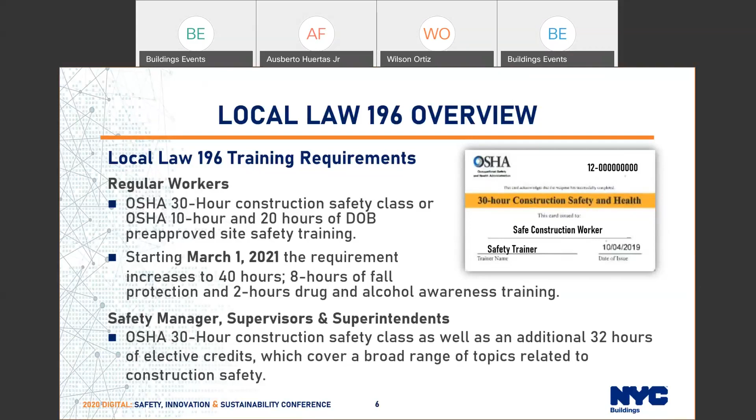Local Law 196 also requires the issuance of site safety training cards. These cards are needed for all active sites requiring a site safety professional. A construction superintendent is required to oversee construction sites up to 9 stories. A site safety coordinator is required to oversee safety on construction sites 10 to 14 stories. A site safety manager is required to oversee safety on construction sites of buildings 15 stories and higher.

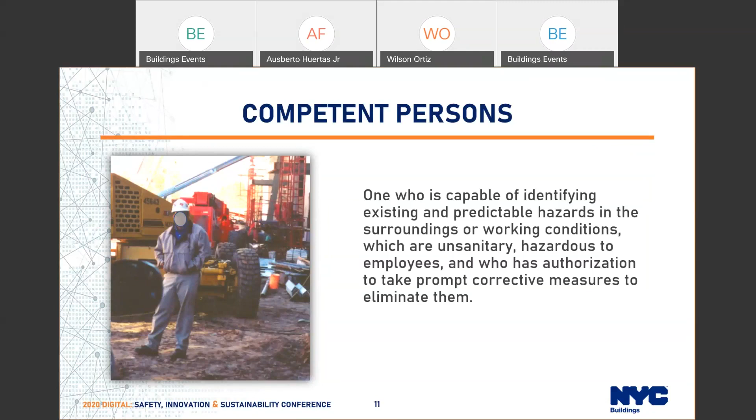Some do's to be aware of if you're selected as the competent person: maintain a site safety presence at all times, stay on site during active construction or until you are relieved from duty, be knowledgeable on the construction activities being performed, keep up to date on training, and keep up to date on new means and methods.

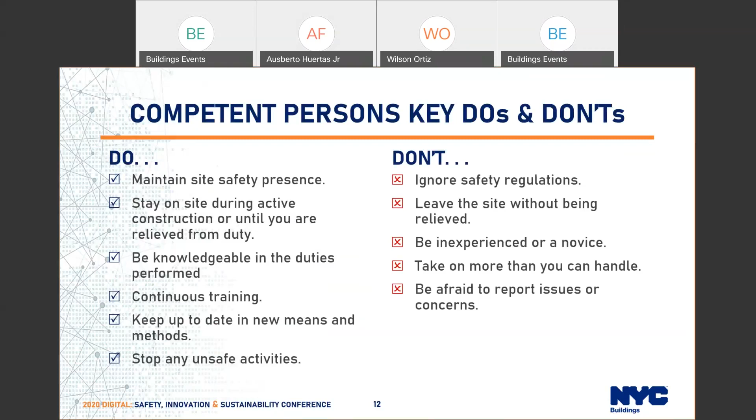Stop any unsafe activities. Some don'ts for being the competent person: don't ignore safety regulations, don't leave the site without being relieved, don't be inexperienced or a novice, don't take on more than you can actually handle, and don't be afraid to report issues or concerns. Remember, safety is everyone's priority.

The next topic we will be discussing is cold-formed steel construction, including incidents and their hazards. We will review case studies which resulted in injury or a fatality, what caused them, and how they could have been prevented. Please keep in mind, every site is different, and prevention measures shown in this presentation may differ from site to site. Not all solutions are suitable for every site.

C-joists are engineered products that perform differently than wood joists. C-joist components provide an economical, lightweight alternative to open web steel joists, cast-in-place or hollow core floor assembly systems, and engineered wood joists. C-joists come in a variety of depths, flange sizes, and steel thicknesses.

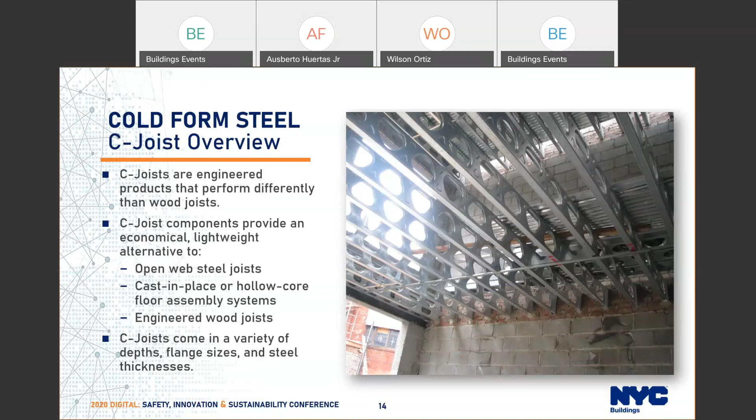Cold-formed steel is commonly used in 1 to 4 story new building construction. It allows for quicker installation of multiple stories due to its light weight. A special inspector must verify the construction of cold-formed steel during its installation. The professional engineer must inspect and approve prior to placing any loads.

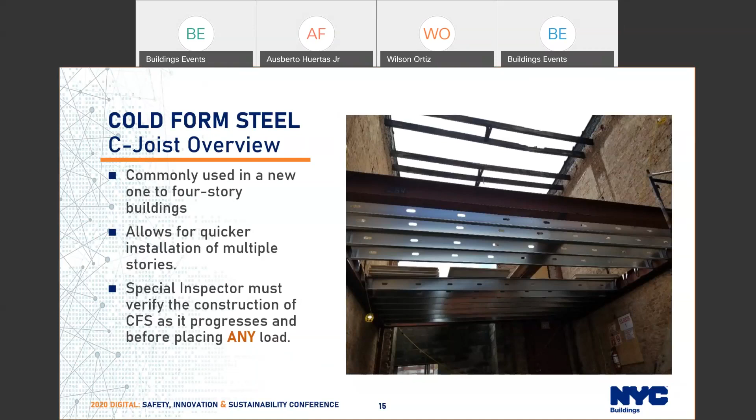In this slide, we have a comparison of wood joists versus C-joists. Here you can see the major differences between the two materials. Some highlights are: timber joists weigh around 7 pounds per linear foot versus C-joists, which weigh around 3 pounds per linear foot. These measurements are based on a 10-inch joist.

Timber joists are not easily accommodating for pipes and ducts, whereas C-joists are manufactured with mechanical pass-throughs. This chart also shows the factor of safety, which takes into account design errors, material defects, and connection errors. With that in mind, wood joists have a factor of safety of 8, compared to C-joists, which have a factor of safety of 0.5. When fully installed, the factor of safety is then increased to 2.5. This shows how important it is that C-joists are installed per the manufacturer's recommendations and the engineer's plans.

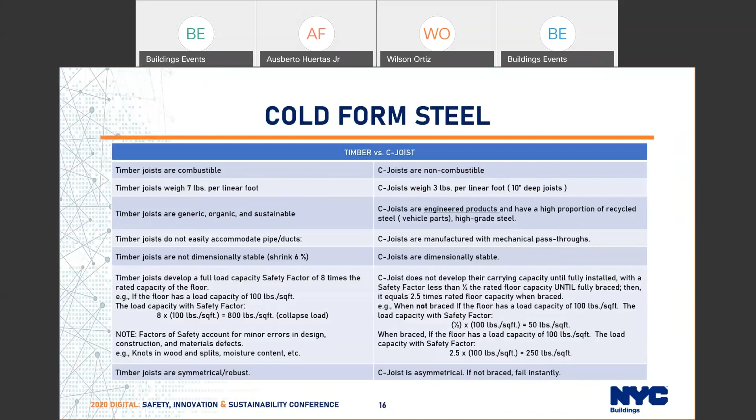Due to the number of incidents through the years, the Department of Buildings has published C-joist system awareness handouts to address bracing and overloading issues. The department has also embarked on an industry outreach campaign that includes C-joist manufacturers and providers.

The outreach notification informed the industry of the following: don't place any loads on decks before properly mounting, fastening, and connecting the C-joist system together. Decks must be completely fastened to the C-joist system before loading. Never overload a deck. Review and follow, without deviating from, the design drawings and the manufacturer's specifications. We will show you examples of these in the upcoming slides.

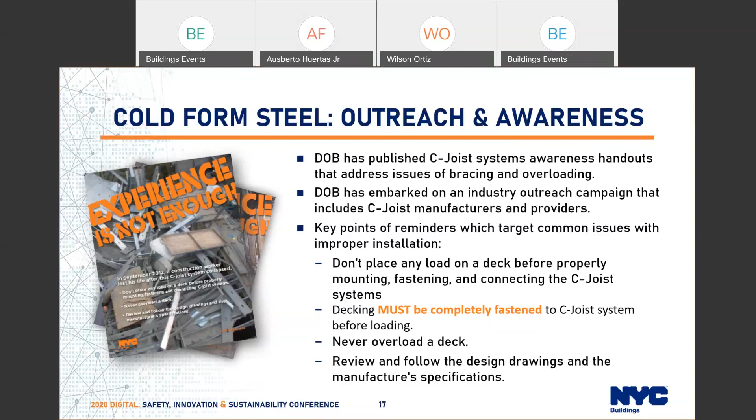Keep in mind that these photos do not take into consideration the overall stability of the structure. It is the responsibility of the licensed professional to design the floor diaphragm and all of its relevant connections, and to take into account wind and seismic loads in the layout. Precautions must be taken to avoid construction overloads and exceeding design live loads.

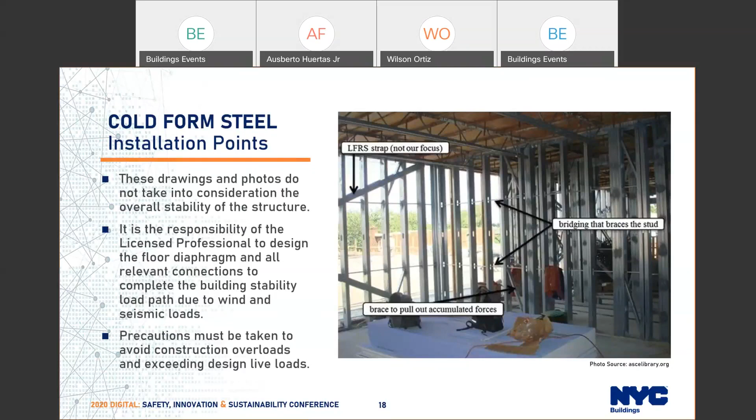Temporary bracing must be installed at the time of installation. It is not to be left out, as it is harder to install after the fact. The joist bridging must be installed when the floor is constructed. Failure to install the bracing at this time may compromise the structural integrity. This is for your safety as well as others.

Notice the number of required parts it takes to properly brace the cold form deck: the flat straps on the top and bottom, joist blocking, and screwing straps, making sure they are screwed into each brace and joist. The decking must be completely fastened to the C-joist before loading the system. All these listed parts are needed in order to secure the system.

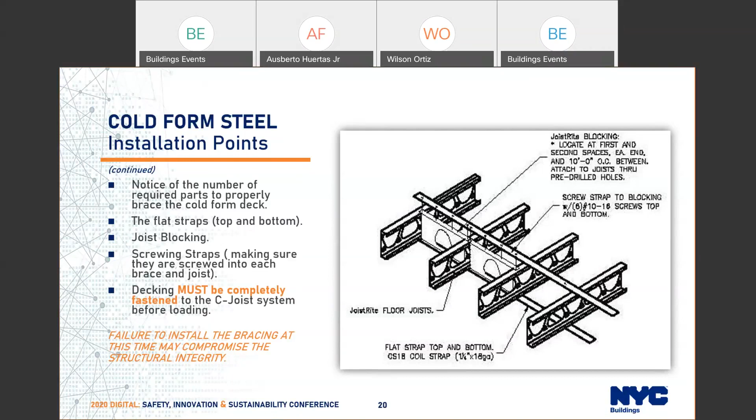Again, failure to install the bracing at this time may compromise the structural integrity. We cannot emphasize this enough.

Keep in mind, the manufacturer's specifications are part of the approved drawings. The system will fail if it's not followed. The system is not secure until all supports, web stiffeners, and connections, along with the bridging, are properly installed.

Pour the lower floor first, before installing the upper floors, to help carry the loads of the upper floor. The key is to tie all the walls together.

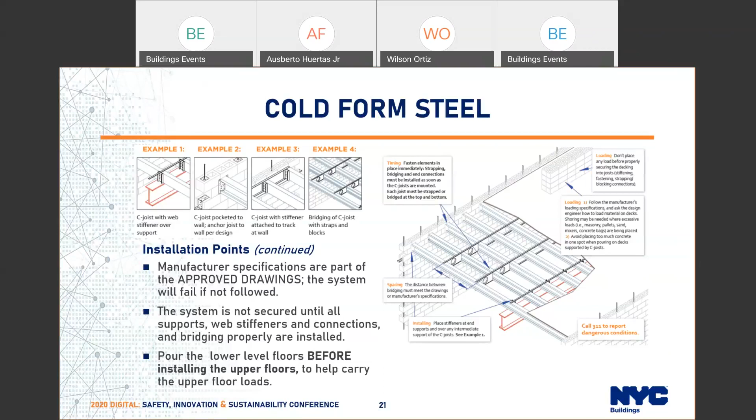During construction, placing even light materials on the unbraced top flange of the C-joist can cause instantaneous sideways buckling. It is an instant, progressive collapse of all the joists, resulting in a large opening.

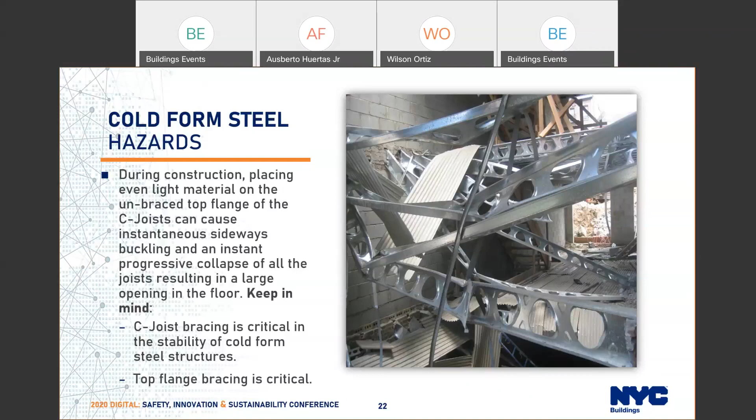Keep in mind, C-joist bracing is critical to the stability of cold form steel structure, and in the installation, the top flange bracing is very critical.

Even in different configurations, until fully installed and braced, C-joists can be structurally unstable and occasionally can collapse without warning. Remember the factor of safety for cold form steel? It's 0.5, and when it's fully installed, the safety factor is then increased to 2.5. It must be installed per the manufacturer's specification and the approved drawings, or it will fail.

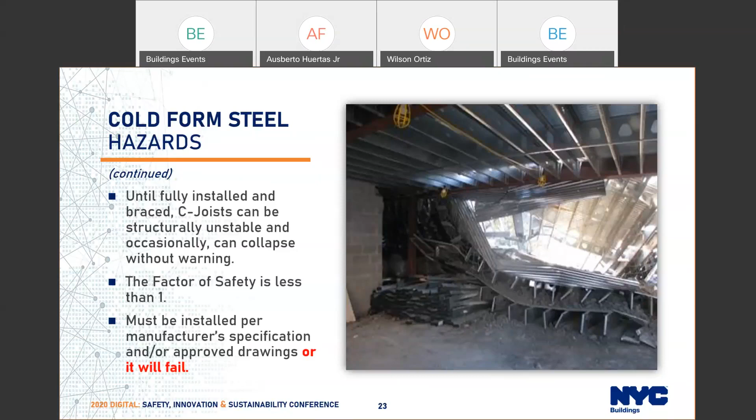As a reminder, cold form steel collapses are very rapid and progressive. It often comes without warning and does not leave enough time for the workers to evacuate. The incidents are usually associated with overloading a platform or not properly fastening and tying the system together.

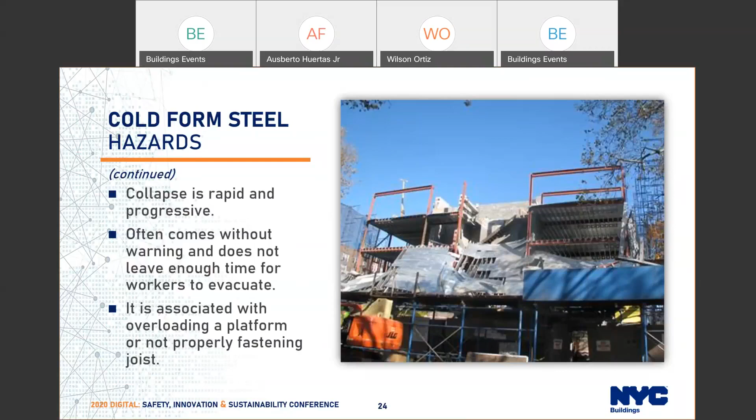I know some of these are repetitive, but it's only to emphasize its importance. The typical causes of collapse are usually due to overloading in areas that are not braced or ready for a load. Stiffeners, bracing, and bridging are usually missing in these incidences.

And failure to pour concrete floors below can cause the exterior walls to buckle, as you can see from this picture.

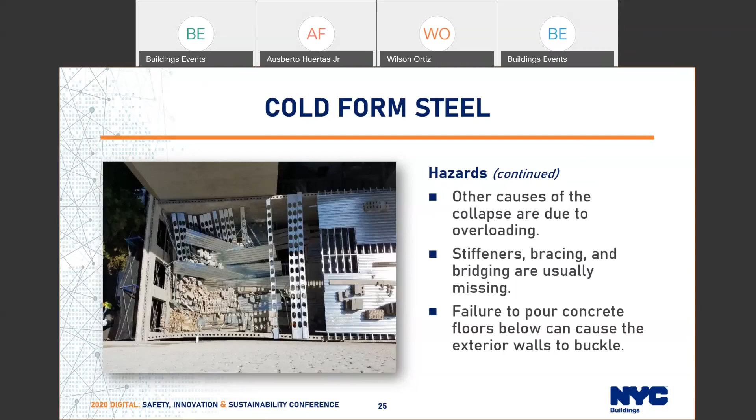This incident occurred in the Bronx in August of 2019. A new 4-story cold form steel construction with CMU blocks: an overloaded elevated deck collapsed. When the load was placed on it, the front half of the 3rd floor deck fell onto the 2nd floor.

With workers underneath it, as a recap, this building received a delivery of CMU blocks which were delivered onto the 3rd floor deck. The deck was not fully installed nor braced. The 3rd floor deck was still in the framing stage and was not shored and braced against rotation or lateral movements. Other workers were staged and working on the floor below. When the CMU was placed on the deck, it triggered the collapse and caused death to 1 worker and injured 5 others. Some of those injured were buried in the collapse and had to be rescued.

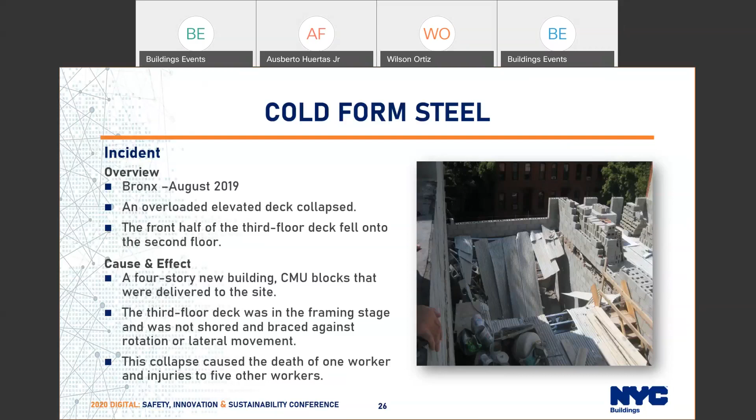Key prevention takeaways for this incident are: prior to loading the deck, ensure it is properly installed per the manufacturer's and the PE's instructions, which we can't stress enough, as this is one of the leading major issues for cold form steel. Never store materials or equipment on floors that are not fully constructed or braced. And prior to placing a load on a deck, verify with a PE that it is safe to load.

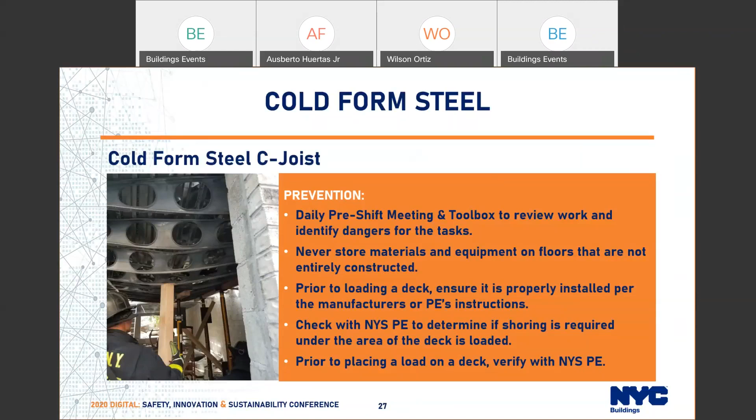This incident involved an 8-story building where, again, CMU blocks were being delivered to an unsecured deck on the 7th floor. The C-joists were not braced and tied, and the floor decking was missing when it took the load. This collapse caused 2 workers to be injured.

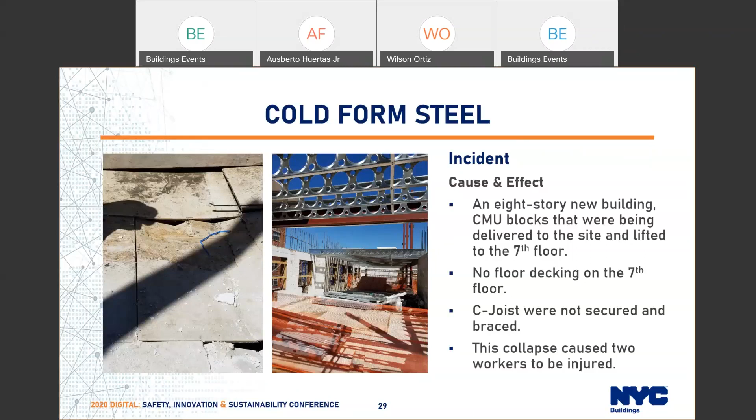Key prevention takeaways for this incident are: a daily pre-shift meeting and toolbox talk to review the work and identify dangers. Workers should have 30-hour OSHA training, fall protection training, and site safety training. Fastening and securing with a pre-inspection should have occurred prior to loading.

Complacency can cause workers to think that they will never be injured. Even if it's done multiple times, it only takes 1 time for something to happen.

Patricia will now present trenches and excavations.

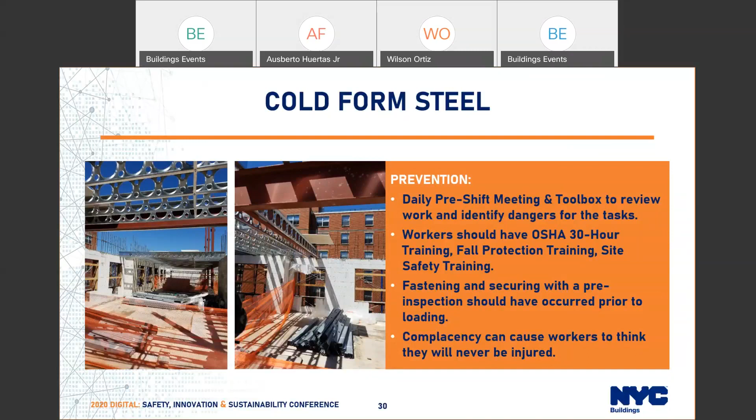Now that we've learned about cold form steel, let's move on to trenches and excavations. In this segment, we will discuss hazards, requirements, incidents and preventions, and we will wrap it up with some safety tips.

After all plans and drawings have been approved and permits are issued, the first thing to do before the start of chipping, digging, or blasting is to notify DOB. Let DOB know 1 to 2 days before any excavation work starts. Call 811 before digging. A ticket number will be issued.

Then call 212-393-2550 with the ticket number.

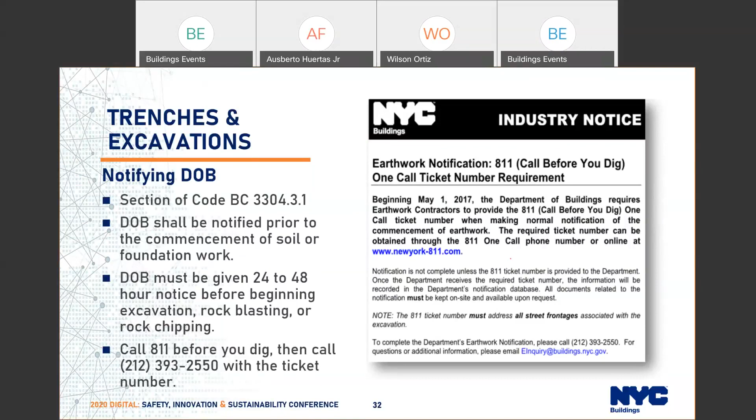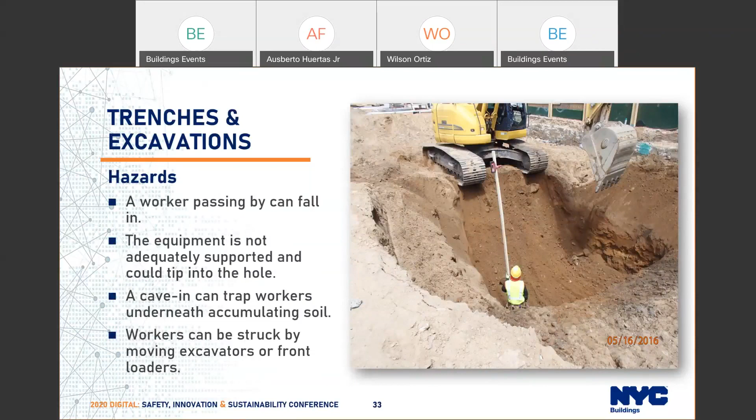Without the proper safety precautions in place, excavation and trenching are among the most hazardous construction operations. Without guardrails, a worker passing by can fall in. If equipment is not properly supported, it can tip in. Cave-ins can trap workers, which almost always cause a fatality. Workers can be struck by moving heavy equipment.

Excavation or trenches 5 feet or deeper require shoring and bracing, or a 45-degree angle of repose, with each step not being higher than 5 feet. When the depth of a trench or excavation is greater than 4 feet, it is required to perform air monitoring as oxygen becomes deficient.

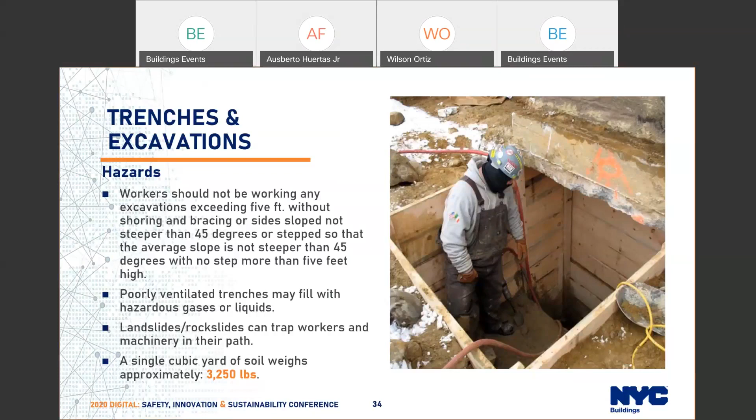Poorly ventilated trenches may fill with hazardous gases or liquids. Other hazards include landslides and rock slides, which can trap workers and machinery in their path. To put this into perspective, a single cubic yard of soil weighs about 3,250 pounds, which is the weight of a small car.

Building codes are in place to help mitigate hazards. The first step in preventing incidents from taking place is to build a construction fence prior to excavating. The construction fence is required to be 8 feet high and built solid for their entire length. A construction fence should be installed in order to protect the workers and the public from any hazards related to the excavation.

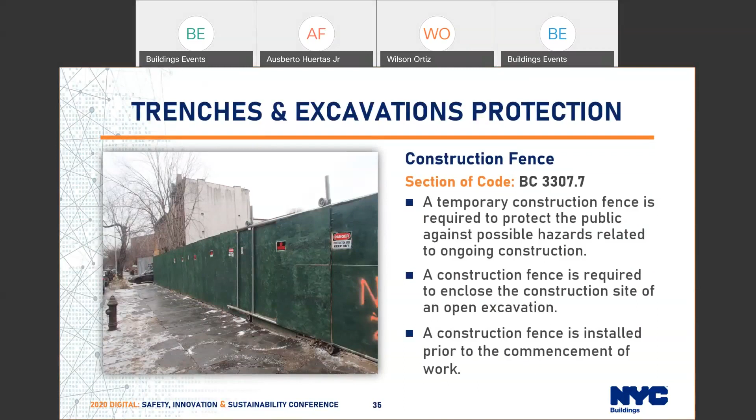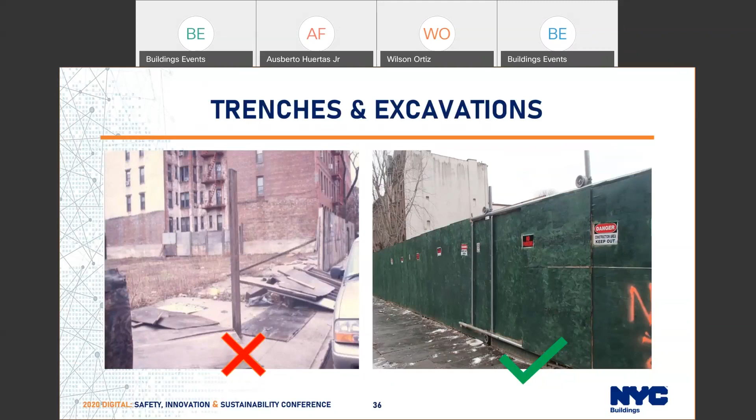The first line of defense a worker has when working by an excavation are guardrails. Guardrails are a key visible reminder that there is an excavation and that workers need to be mindful of what is going on around them. Guardrails protect workers from accidentally falling into the excavation.

The guardrails shall be made up of a top rail, which should be between 39 to 45 inches above the floor, a toe board, which should be 3.5 inches high with no more than a 1/4 inch gap between the floor and the bottom of the toe board, and the mid rail, which should be halfway between the top rail and the toe board. The other option for a guardrail is a solid enclosure of 3.5 feet.

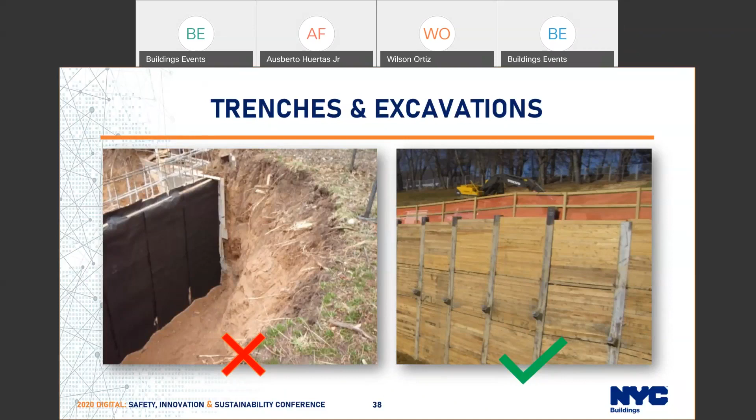This is the first incident that we will be reviewing. It took place in Queens in January of 2019. The support of excavation collapsed into the construction site along with 40 feet of the boulevard. Workers informed our inspectors that they were concerned for their lives while they were working in the excavation. If you see something that does not seem right, please bring it up to the site safety professional.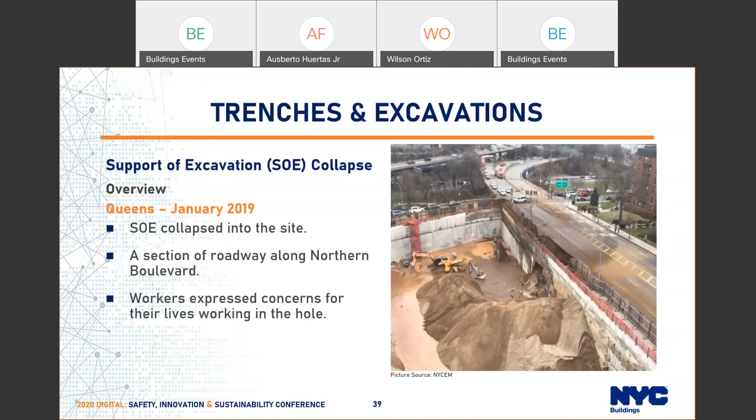Here, support of excavation was not maintained, nor was it built according to the approved plans. On the right side of the photo, there are soil nails, which was supposed to be placed every 5 feet in both directions. If you look closely, you can see they stopped placing the soil nails towards the bottom, as the workers were told it did not need to be done. What you can't see was the soil nails were supposed to be grouted as well, which was also not done.

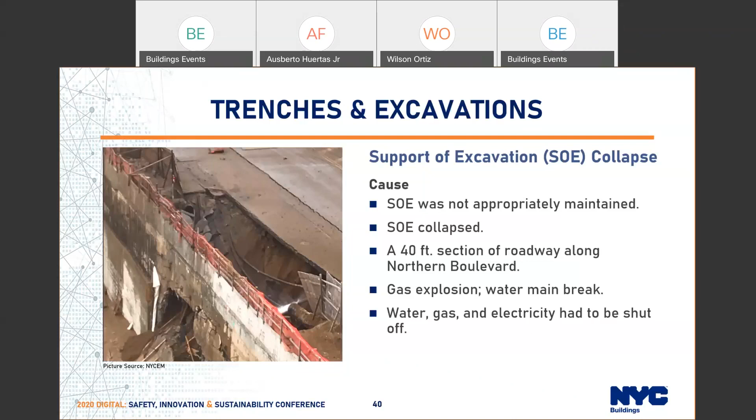As they were working, the workers noticed the walls were bulging at the bottom. If you look to the left by the waterproofing membrane, the top of the wall was 24 inches thick and the bottom was 8 inches thick. Because the wall behind it was pulling out as they were pouring the foundation, eventually the pressure caused the wall to blow out. This collapse caused a gas explosion and a water main break, which had to be shut down. The boulevard was also shut down to traffic.

An important element to preventing incidents on construction sites are the daily pre-shift meeting and toolbox talk. These meetings should identify the tasks of the day and identify any hazards associated with those tasks. One cannot protect themselves if they are not made aware of the risks and hazards of each operation.

All drawings have the factor of safety associated with the design. However, the factor of safety only takes into account minor material defects or installation errors. Factor of safety will not compensate for missing all of the lower soil nails from not being installed and properly set.

The weight of the adjacent road collapsed into the excavation due to not installing the support of excavation according to the approved plans. When performing these operations, it is standard to monitor the movement of the walls. Had monitoring devices been installed and utilized, there is a strong possibility that the collapse would not have occurred. The monitoring device would have raised a red flag to the PE or the super, who would have stopped and analyzed the situation and determined the issue and how to remediate it.

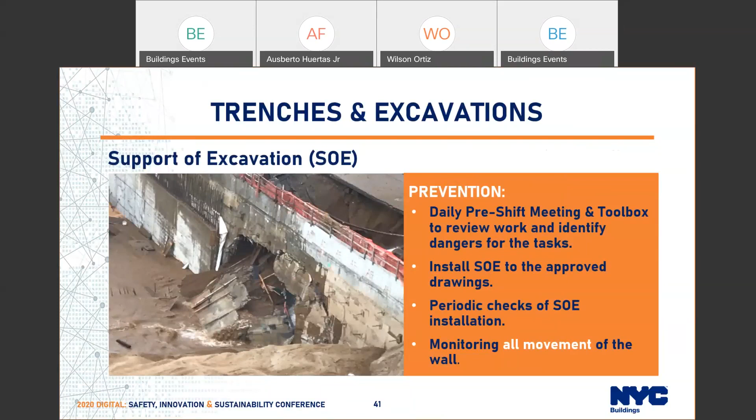Moving on to how to protect an excavation. Per the DOB building code, all sides of an excavation with a depth of 5 feet or more shall be supported by either installing sheeting, shoring, or bracing, or the side slope are not to be steeper than 45 degrees, or stepped so that the average slope is not steeper than 45 degrees. There should be no step more than 5 feet high.

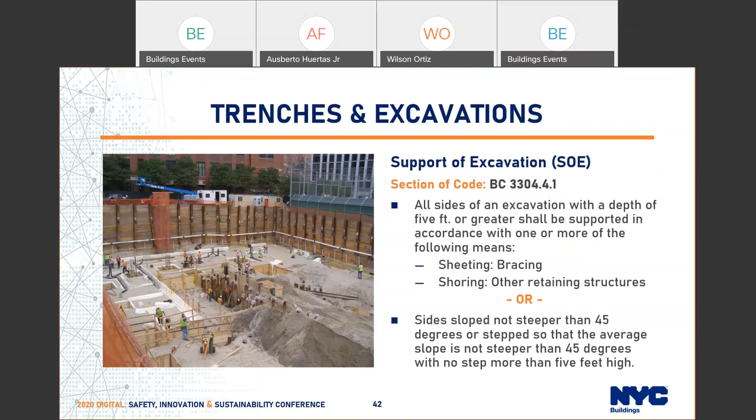To the left, we have a picture of an excavation with the support of excavation missing. The picture on the right shows the proper support of excavation in place. Here we see the soldier piles and lagging providing the needed support to hold back the soil from collapsing into the wall.

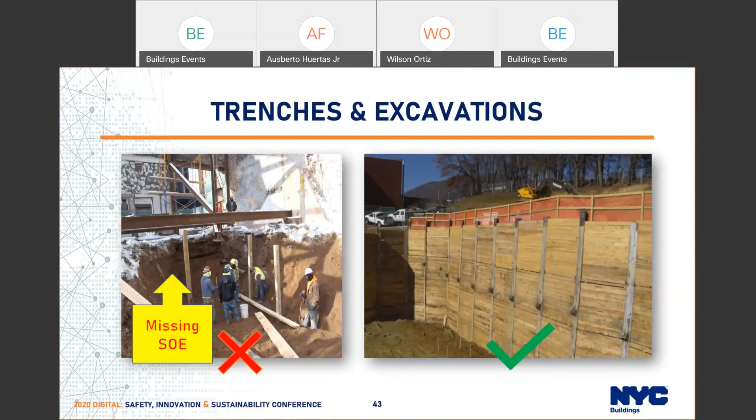In this next comparison, on the left, we have a picture of another excavation. The trench box is missing in this case. A trench box is typically used when performing utility work or working in small spaces. The picture on the right shows a worker in a trench box, which are usually 8 to 12 inches thick.

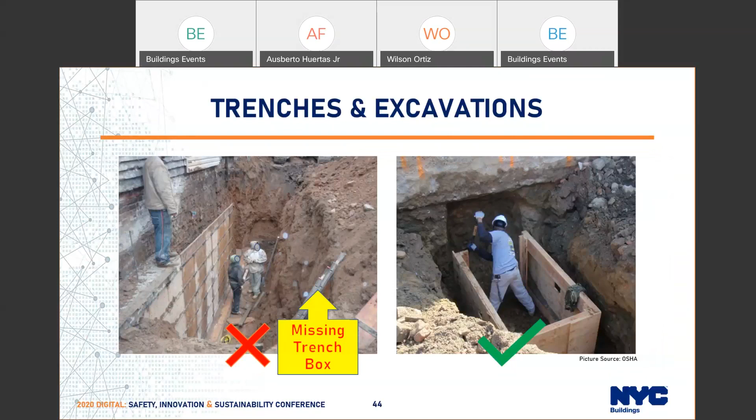Again, on the left, we see a picture of an excavation, and there is no support of excavation, no trench box, and no angle of repose. On the right is a diagram showing an angle of repose. As a reminder, the side slope are not to be steeper than 45 degrees, or stepped so that the average slope is not steeper than 45 degrees. There should be no step more than 5 feet high.

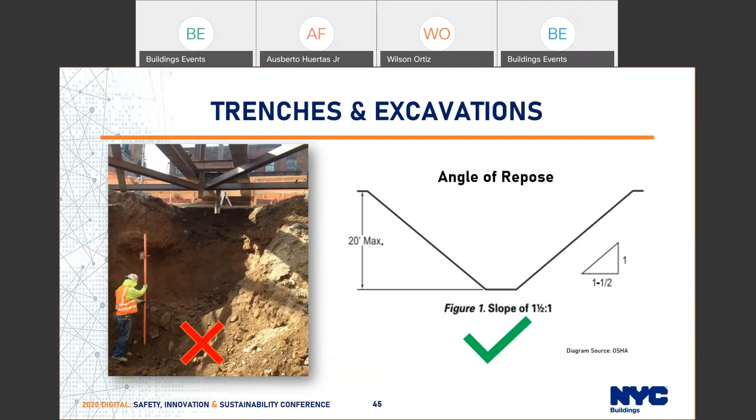Another potential hazard that workers are at risk for is caught in between. A worker can be caught in between heavy equipment or objects and sides of the excavation. The work going on in a trench may also create a hazard. For instance, when laying pipe in a trench, a caught in between hazard exists because workers can get caught in between the pipe and the trench walls.

Anything being placed into the trench or excavation may be a hazard, including the protection system. Workers must be careful while installing the protection system so they are not caught in between the trench walls and the protection system. Keep heavy equipment away from edges of trenches and excavations, as it should be 1.5 times the depth of excavation until shored and braced.

Trenches or excavations can be very dangerous when they have water inside. The water can soften the soil and cause it to collapse. Workers should not work inside an excavation where water has accumulated or is accumulating unless it is controlled by using pumps or other equipment. Water in an excavation can undermine the sides of the excavation and make it difficult for workers to get out.

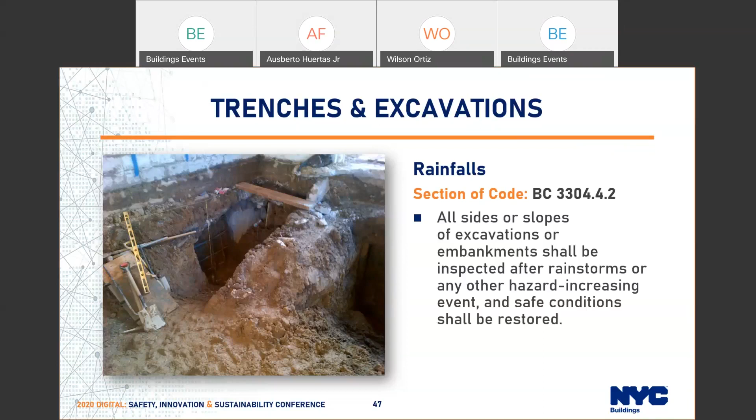Workers should not enter an excavation where water has accumulated or is accumulating unless adequate precautions are taken to protect workers. Such precautions can include special trenching and excavation support or shield systems to prevent cave-ins, water removal to control the water level, or the use of a safety harness and lifeline.

Here are some safety tips to keep in mind for when you are around trenches and excavations. Before getting inside a trench, the trench should be inspected. Keep loads and spoils at least 2 feet from the edges of trenches and excavations. Do not work under a raised load. Know where underground utilities are located. Test for low oxygen, hazardous fumes, and toxic gases.

Ozzy will now continue with controlled access zones.

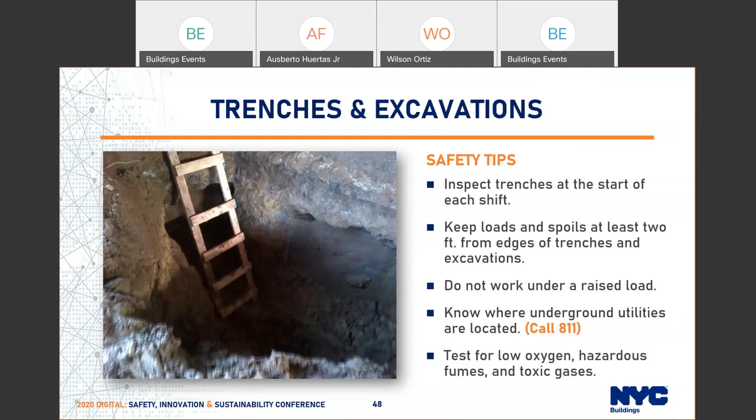Thanks, Patricia. In this topic, we will discuss control access zones. We will review case studies which resulted in injury or a fatality, what caused them, and how they could have been prevented.

Areas designated as controlled access zones must be visibly and clearly marked to alert the workers of the presence of a risk in that area. Wires, tapes, or rope control lines may be used to identify the hazardous areas. The control lines must be flagged at intervals of not more than 6 feet with high visibility material.

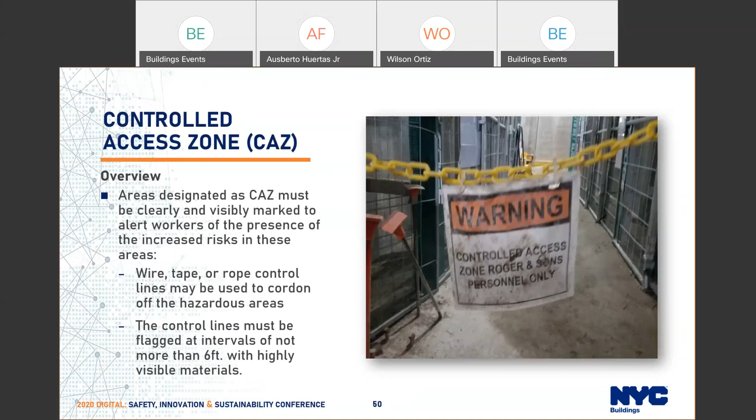Control lines must be connected to both sides of the wall or a secure guardrail system and must run parallel along the entire length of the leading edge. They must be strong enough to withstand the force of an impact of at least 200 pounds.

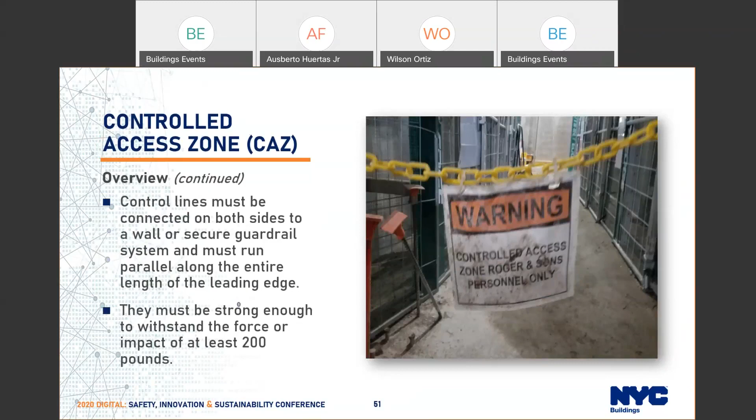Risk is higher in all directions of an established control access zone. Avoid the control access zone area if you are not working in that area. Workers should be trained in the proper use of fall protection equipment, the procedures of working in a control access zone, and know the hazards. Incorporating fall protection requirements into everyday activities will ensure worker safety in areas deemed hazardous due to high elevation or the potential of serious falls.

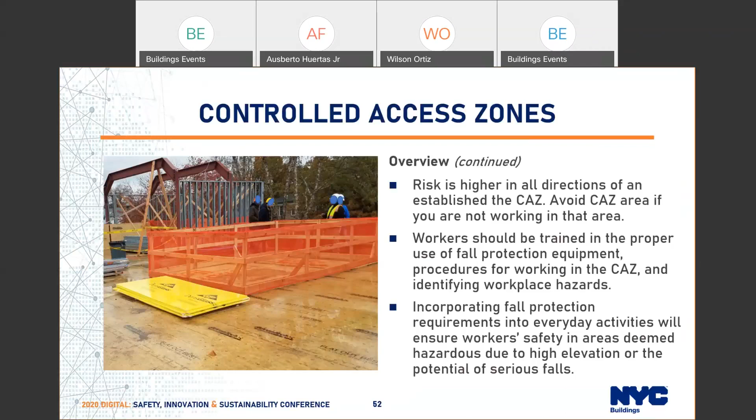When in a control access zone, workers must be tied off, as they may not have access to guardrails, safety nets, and a personal fall arrest system to rely on. When in a control access zone, ensure you are aware of the boundaries. Establish the restricted area and the limitations. In general, do not engage in unsafe activities, especially when in these areas.

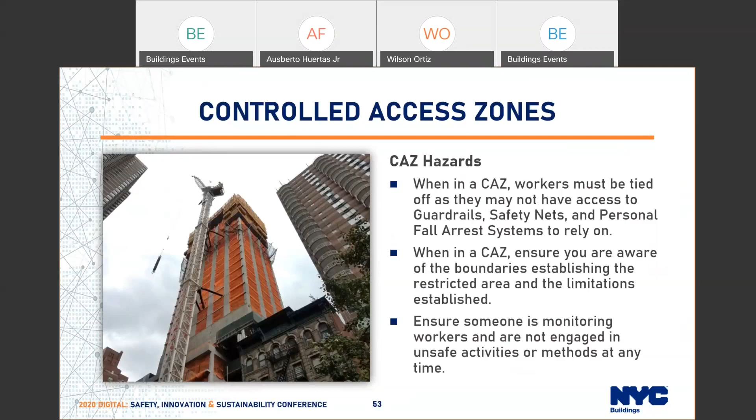This incident occurred in Manhattan on January of 2019. The worker fell from a 6th floor to the 5th floor. The opening was covered with an unsecured plywood, which was not properly marked, causing the worker to slip and fall. The plywood lacked any markings or warnings that a hole was present. No signs were posted in the area with an indication of the opening. No control access zone was placed in this area either.

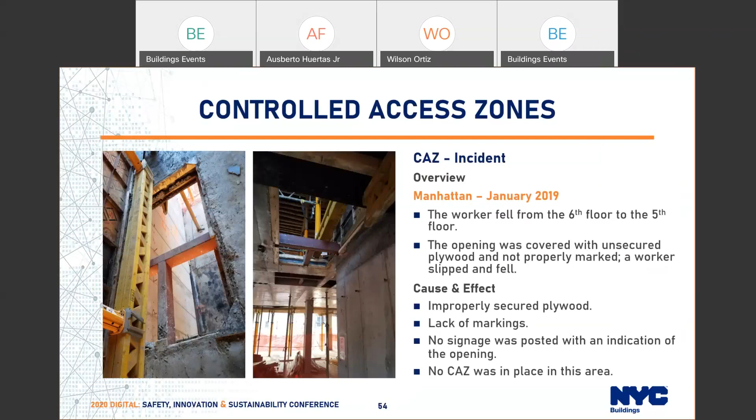Prevention measures should have included having a daily pre-shift meeting and toolbox talk to review the work and identify the dangers. Workers should have 30-hour OSHA training, fall protection training, and site safety training. The opening should have been covered with plywood, screwed down, and clearly marked.

Workers need to be aware of their surroundings when walking on a construction site. If you see a hazard, report it. Complacency can cause the worker to think they will never be injured.

This incident occurred in Manhattan on September of 2019. A panel fell during stripping operations on the 26th floor. A worker was walking underneath the work area when the panel fell. When DOB arrived, it became apparent that stripping operations were not clear to the workers. The removal sequence was not being followed at the time of the operations. A control access zone was not established around the fall zone area during these operations.

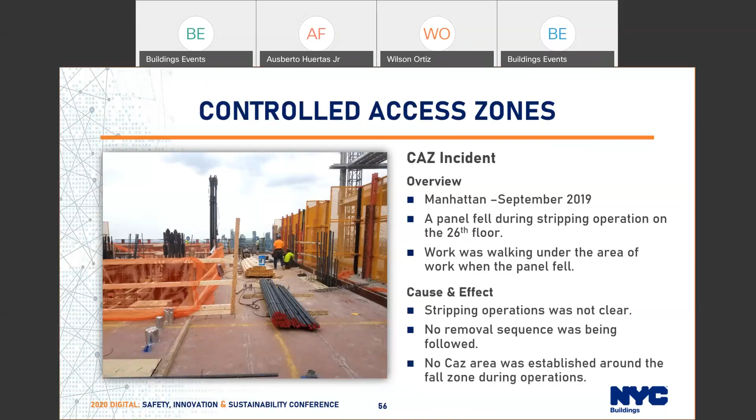Preventative measures should have included having a daily pre-shift meeting and toolbox talk to review work and identify the dangers. Workers should have had 30-hour OSHA training, fall protection training, and site safety training. Establish a control access zone with the proper means and method to perform the operation safely. Provide signage and set up monitoring during operations. And be mindful of the potential areas where debris can fall.

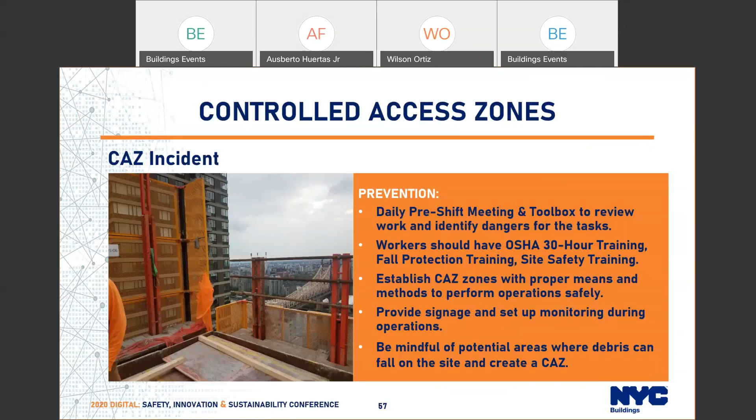Patricia will now discuss fall protection and leading edge.

Now that we learned about controlled access zones, we will continue learning about fall protection and leading edge hazards. We will touch on overview, anatomy of a fall, incidents and prevention, and fall protection systems.

Falls are the leading cause of injuries and fatalities in New York City construction at 38% and 58% respectively. There have been 12 fatalities each year from 2016 to 2019. In 2016, 50% of the fatalities were related to the lack of fall protection. 6 of the 12 fatalities could be alive today if they were wearing fall protection. In 2017, 83% of the deaths were preventable with fall protection. In 2018, 25% of the fatalities were due to falls. And in 2019, 58% of the fatalities could have been prevented. 7 of the 12 workers could still be alive today if fall protection measures were in place.

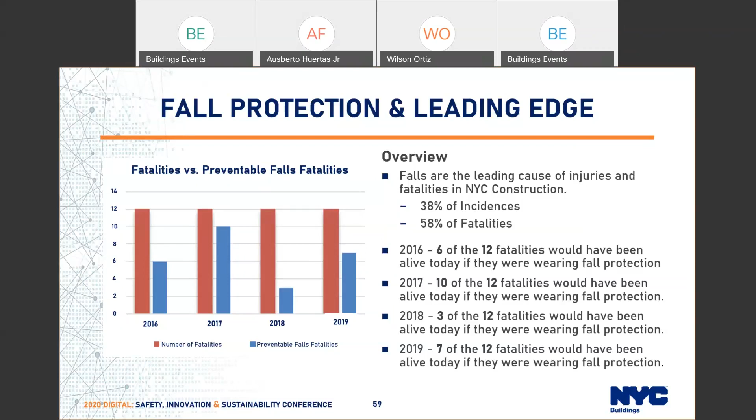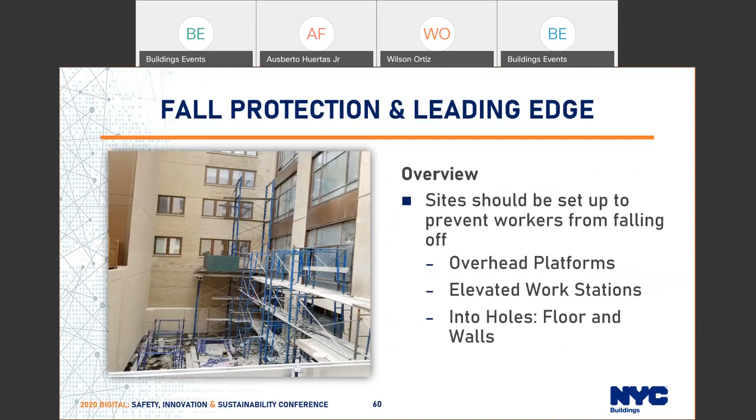Having appropriate fall protection measures in place means that the site is set up to help prevent workers from falling off overhead platforms, elevated workstations, or through holes. Fall protection is required when work is being performed in an area above 6 feet from a lower level, as discussed earlier in excavations and trenches. Fall protection is also required when working on a scaffolding over 10 feet in height or when climbing a fixed 24-foot vertical ladder without a cage.

In the next slide, we will discuss how we unconsciously react while falling.

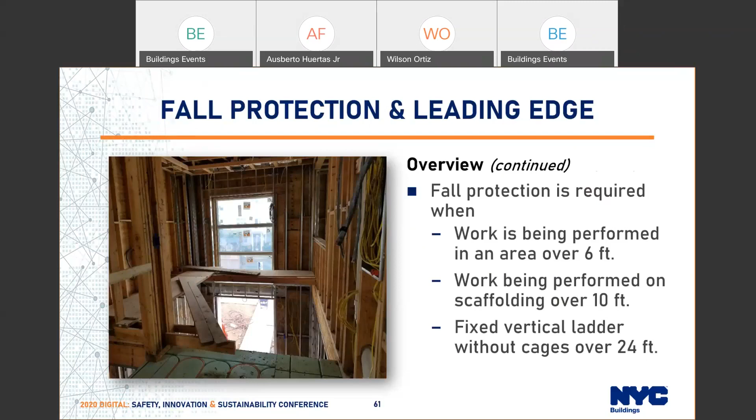I find the information on this slide to be intriguing. I found it very interesting to learn that a person will fall 2 feet before they even realize they are falling, and it takes 1/3 of a second to fall those 2 feet. It will take 2/3 of a second for the body to start reacting to a fall, and by that point, they would have fallen 7 feet. It takes only 1 second to fall 16 feet and 2 seconds to fall 64 feet. Think about that. In double the amount of time, just 2 seconds, a person will fall 4 times the distance, 64 feet, which is equivalent to a 4 to 5 story building.

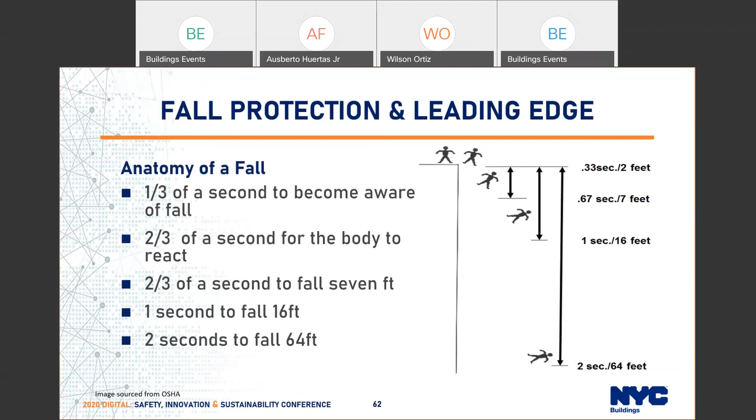This incident happened in Brooklyn in April of 2019. A worker was unloading delivered materials when he tripped and fell. He fell through a hole as the floorboards were not in place since the joists were not secured. Although the worker was wearing the fall protection required, he was not clipped in and tied off.

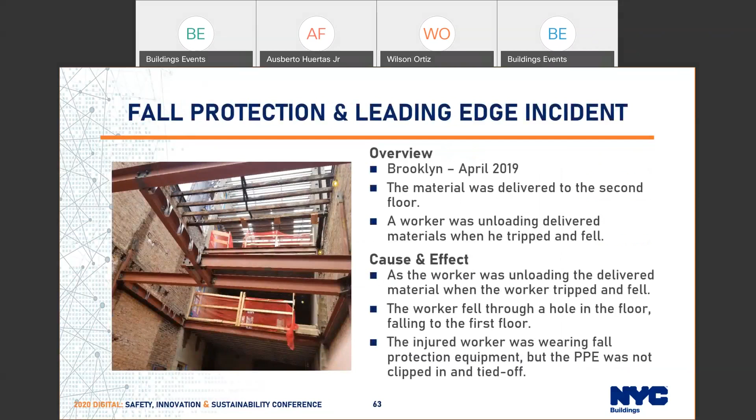An important method of preventing an incident is being aware of potential hazards that will be encountered while performing the operations. Workers are informed of potential dangers during pre-shift meetings and toolbox talks. If the area is going to be trafficked, every effort should have been made to secure the floor joists so the boards could be laid out.

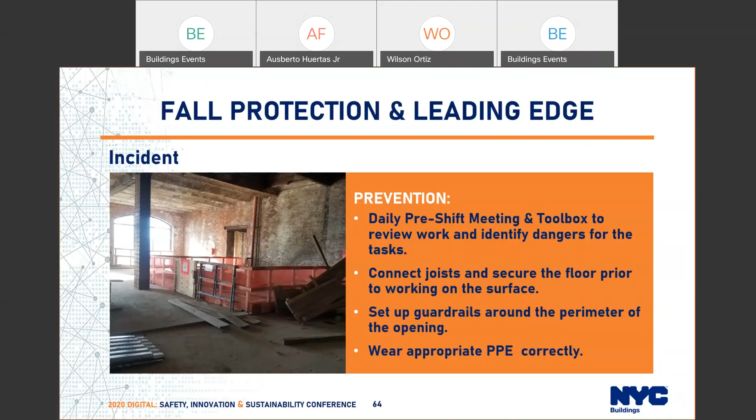Setting up guardrails is a visible reminder that there is a 6-foot drop nearby. However, all the precautions can be put in place, but if you are not wearing your PPE appropriately, you're putting yourself at risk.

This incident took place in Manhattan in April of 2017. The workers were working on a gut rehab. A worker was demoing steel beams from the structure. The worker was throwing debris and demoed steel through the opening onto the first floor.

The steel members being removed had lugs welded on them. As he threw a piece of steel to the first floor through the opening, a lug caught onto the worker's belt loop and pulled the worker, and he went through the hole, falling 20 feet to his death. Had the worker been tied off, he would still possibly be alive today.

Preventative measures that should have taken place include a pre-shift meeting, which is the appropriate time to initially let workers know of the hazards and precautions that should be taken with each task that is performed. When working near openings, it is required to wear a personal fall arrest system and be tied off. Set up guardrails around the perimeter of openings where possible.

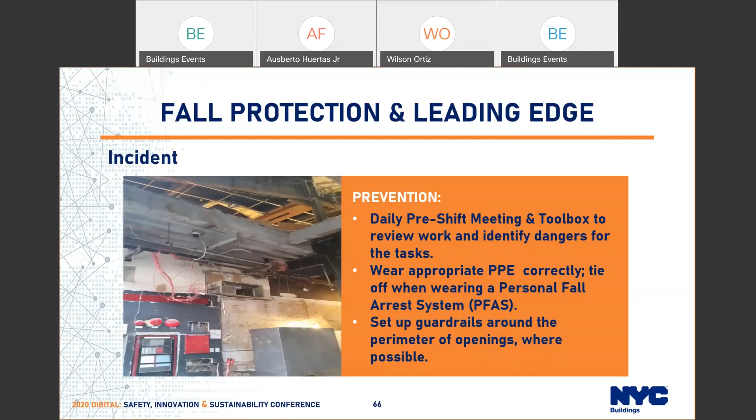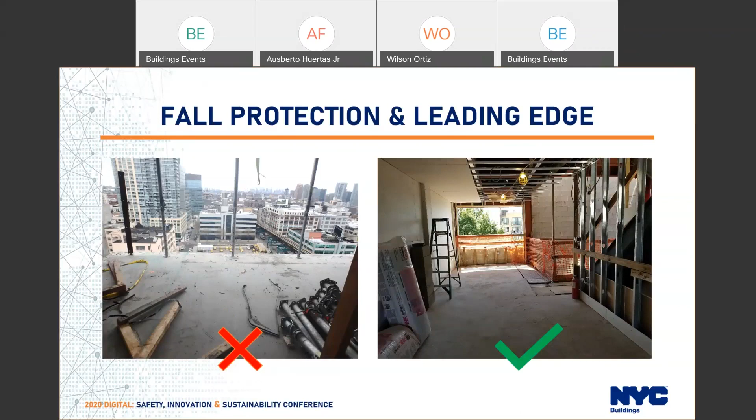In September of 2017, workers were lifting a PERI system. The workers had loosened the clamps and pulled the PERI system straight up the wall on the rails. The issue encountered by the workers was that the wall was a setback exterior wall. The workers got on the PERI system with crowbars.

Instead of loosening the bolts and taking it off, the workers used the crowbars, placing them between the PERI system and the steel. They used the crowbars to pull the steel away from the concrete. They did this with 8 workers still on the PERI system.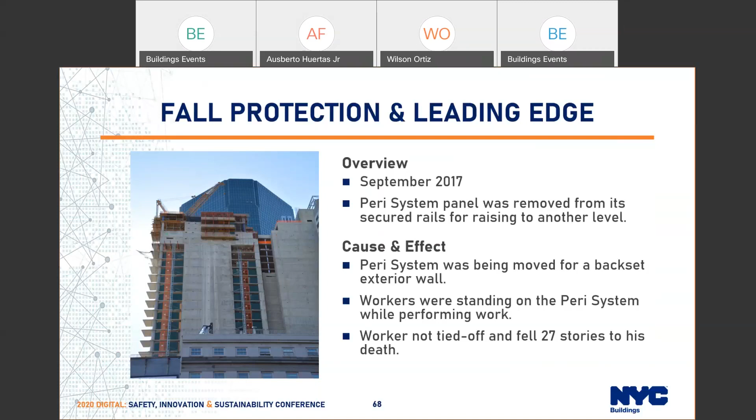As soon as the workers were able to pull the Peri System from the concrete, the system started to sway and the workers lost their balance. One of the 8 workers was not wearing a personal fall arrest system, and he fell 27 stories to his death.

Preventative measures should have included a pre-shift meeting and toolbox talk addressing the risks and the jumping procedures. Workers should have been reminded to follow the manufacturer's instructions. No worker should have been on the Peri System at any point while jumping the system. All of the workers should have been inside the structure, wearing a personal fall arrest system and tied off. Workers should never ride materials that are being lifted.

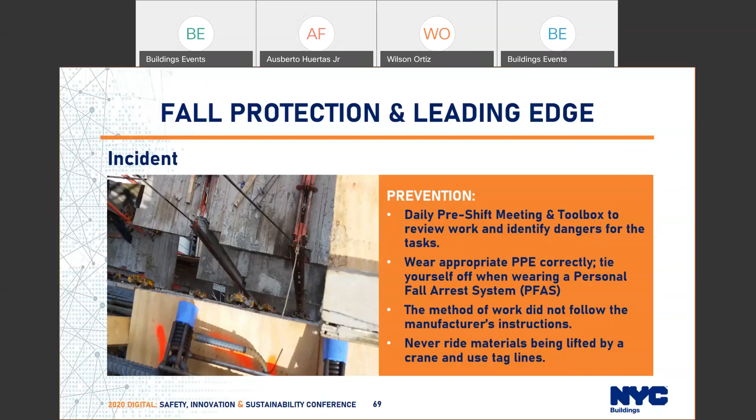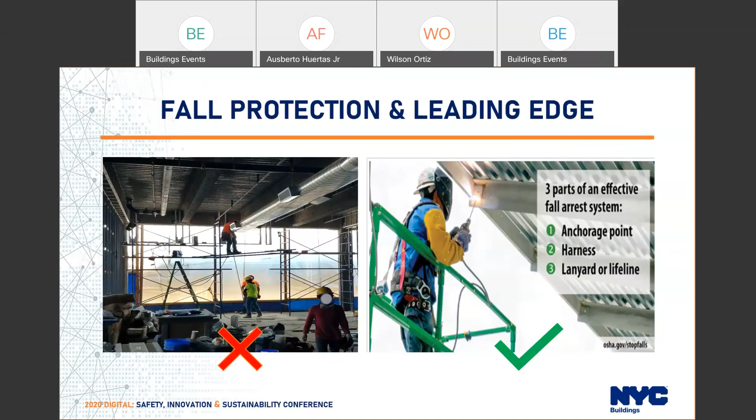Proper work planning can eliminate most situations where a personal fall arrest system is required. Most likely you will experience some type of injury if you are involved in a fall event. Personal fall arrest systems should be used when other fall prevention means cannot be used or are not feasible. They are used to protect a worker from hitting a lower level once they have fallen. Components of the personal fall arrest system include an anchorage point, body harness, deceleration device, and connectors, which are lanyards, rope grabs, and anchorage connectors.

A harness needs to be inspected before each use by the worker and checked and documented annually by a competent person. Harnesses should never be modified. It should be taken out of service immediately if found defective or exposed to an impact.

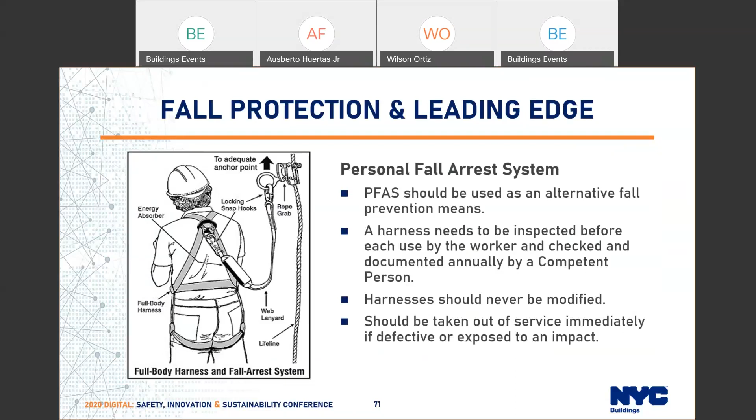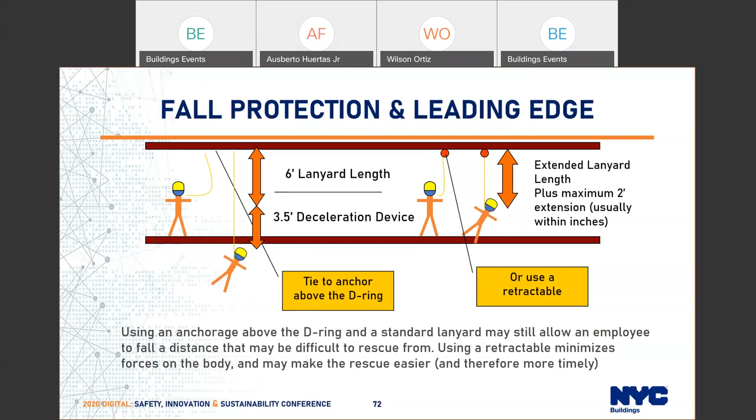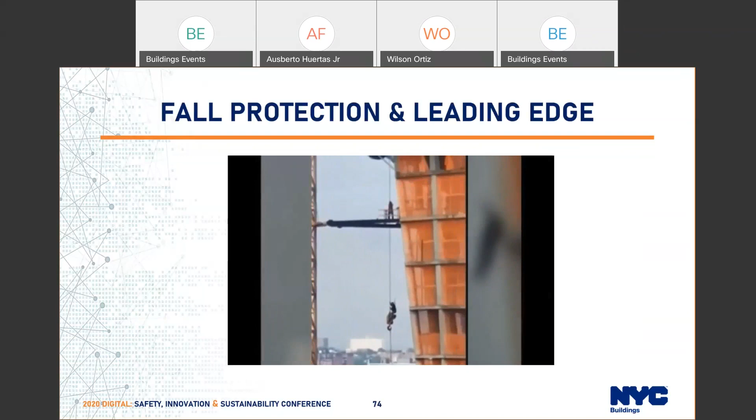In this near miss, a worker fall took place in Manhattan last year. A worker was installing a railing on a crane tie when he slipped and fell off the crane tower, as you can see in this video. Fortunately, the worker was wearing a personal fall arrest system. The harness and lifeline prevented him from falling to the ground. The other workers lowered the crane, and the worker climbed onto the headache ball and was pulled up to the top of the tower crane. Wearing the harness and being tied off saved his life.

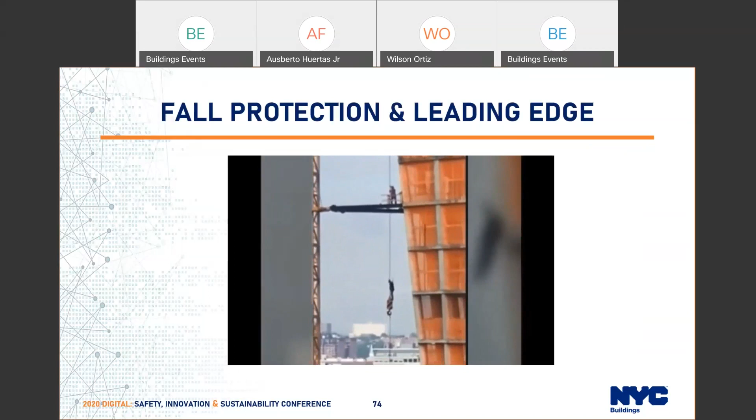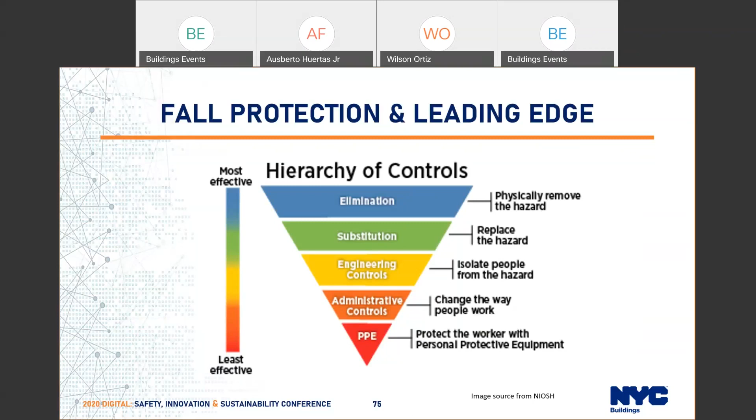Now Ozzy will continue talking about workers' rights.

Thanks, Patricia. We will wrap up the presentation with workers' rights, how to report a safety issue, protecting yourself, and how to report any incidences.

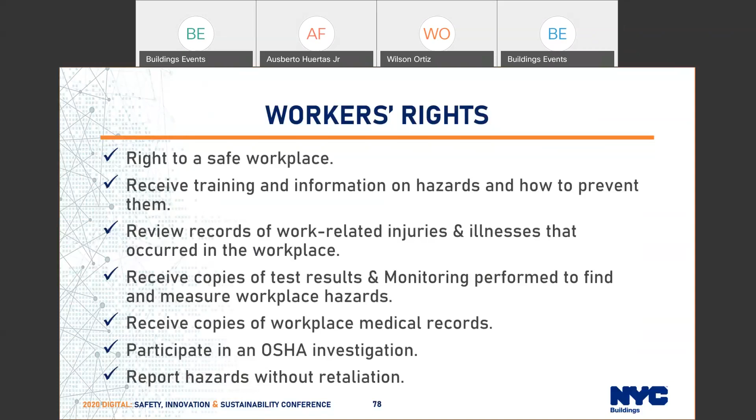The first step in keeping yourself safe is by being aware of your surroundings and knowing what is going on around you. It is important for you to know your rights, and one of the rights is to work in a safe environment. You can keep yourself safe by being trained, through site safety training such as fall protection and scaffold training, but also training on how to use your tools, equipment, and machinery correctly.

If you feel you are working in an unsafe construction site, with a hazardous condition that's placing you at risk, you can lodge an anonymous complaint with 311.

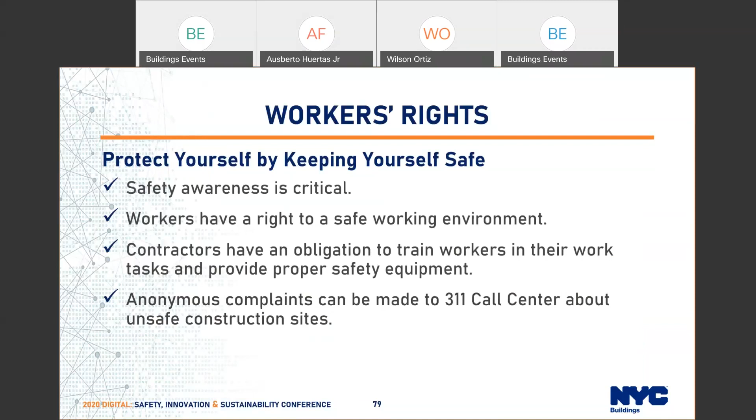If you would like to learn more about your rights, visit nyc.gov/nycsafety.

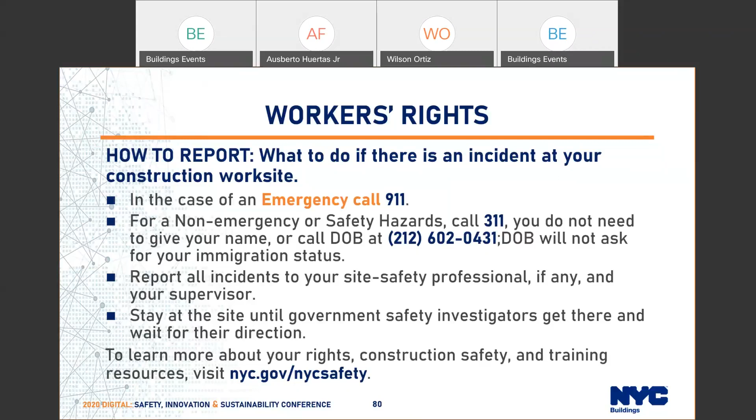For more information regarding worker safety, please go to the link shown. If you have any questions regarding training requirements, please contact DOB. You can email locallaw196@buildings.nyc.gov for those questions.